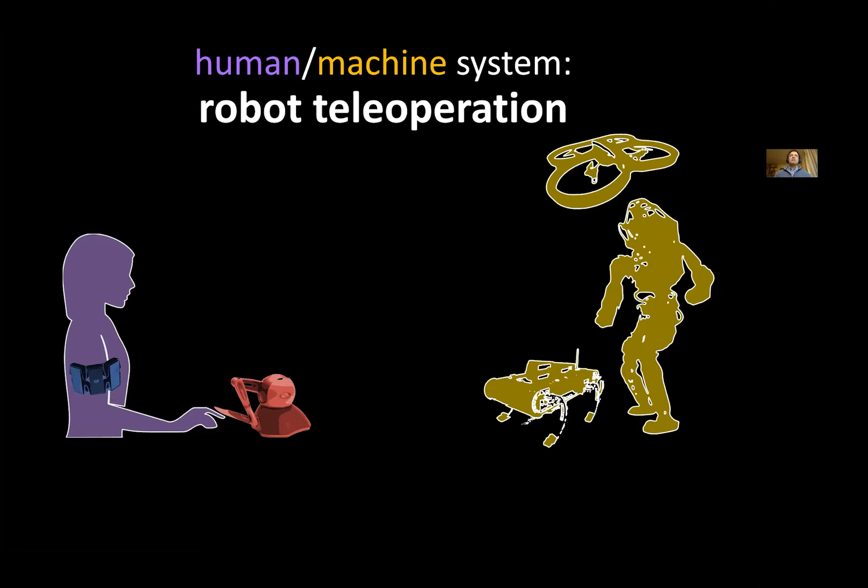So for the purpose of describing my research and grounding this discussion a bit more in a specific set of examples, let's think about the problem of robot teleoperation. This is nice because it has the human in the loop, but it pulls the human and the machine apart so that we can cleanly design and reason about the interface between them, and they're not necessarily physically directly coupled the way they are in those other examples.

And so the basic idea, if you haven't seen this picture of robot teleoperation before, is that we have some interface, mechanical, digital, display, things like that, that's recording information from the human. So they have a joystick, or some other fancier interface, an example of which I'll talk about in the second part of my talk, providing input to the robot. And the robot is in the same room, or across the hall, or away in a field somewhere. So it's a remote robot.

And then that robot is providing back some sensory input that's displayed to the person in a variety of ways. That could be as simple as a computer display, or maybe a virtual or augmented reality headset, or it could be more fancy like a vibrotactile display, a haptic feedback system, or potentially direct neural stimulation. And again, robot teleoperation itself is a very big field with a lot of different possible applications and contexts.

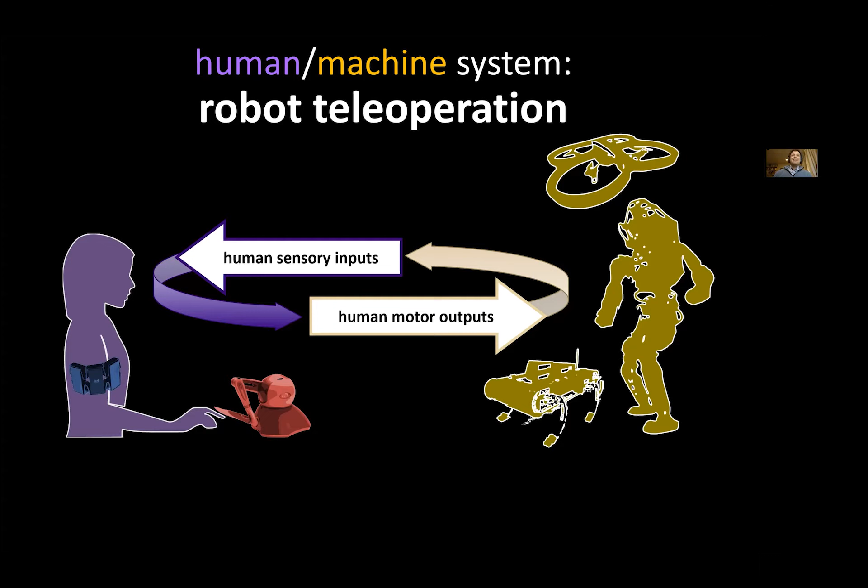So just to put a finer point on it for the purpose of my research, not necessarily the other people's that will be in this colloquium series, and something that's probably on everybody's mind in recent memory, think about the challenge of what we do when there's a forest fire. Right now, other than just cross our fingers and hope it doesn't come too near us, what we do is we send in very brave first responders, right? So we might evacuate some subset of the general public, but we immediately put more people directly in harm's way to try to protect our communities and people. And that's the best that we have at this point.

But wouldn't it be great if we could pull those people out of immediate danger and replace them with some kind of firefighting robot, so that if that robot were to burn up in the fire or get damaged, that would cost a lot of money to replace, but it wouldn't be a loss of human life.

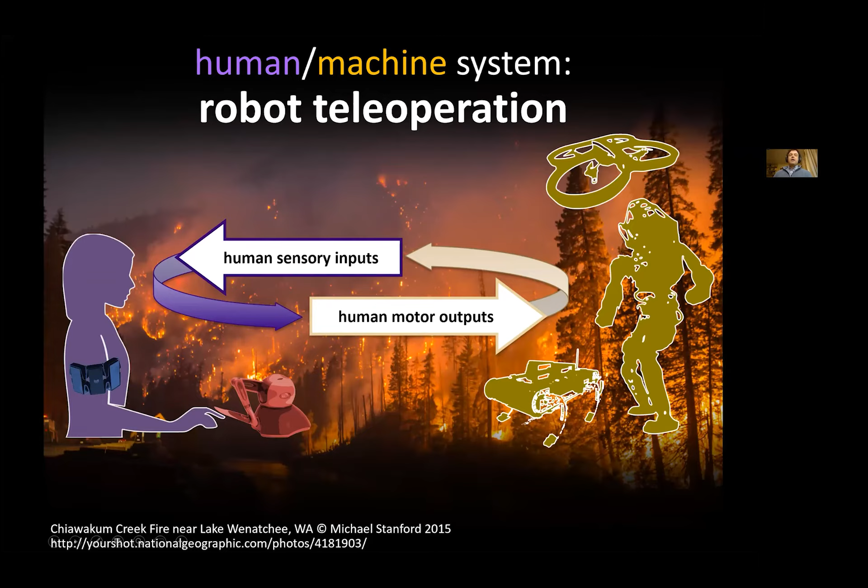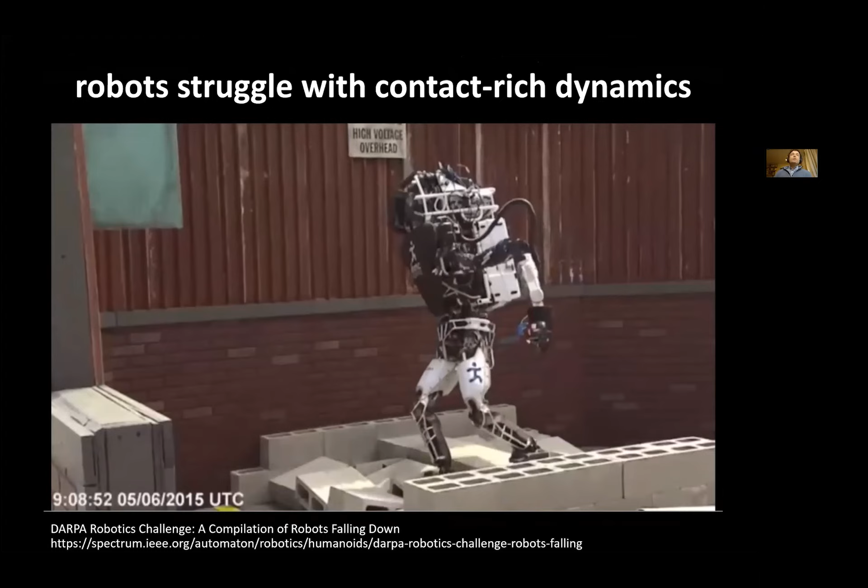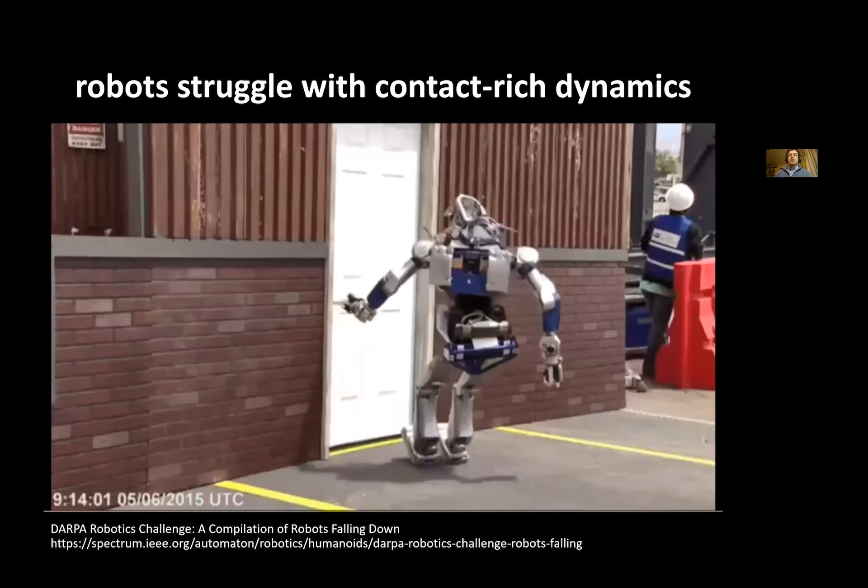However, if you happen to track the results of a recent worldwide multi-million-dollar robotics competition, you wouldn't want to rely on autonomous robots to do your firefighting tasks or other kinds of safety critical, high operational tempo tasks for the foreseeable future. And I don't like to make fun of the outcomes.

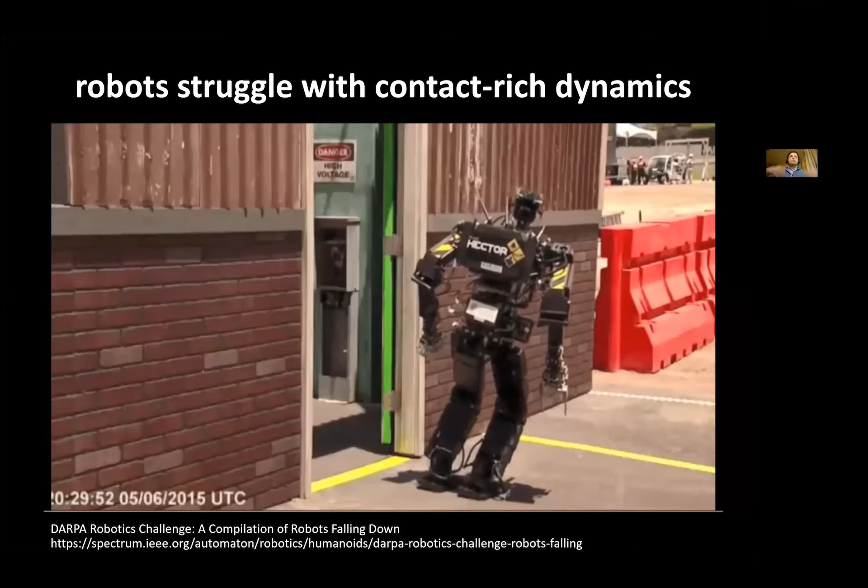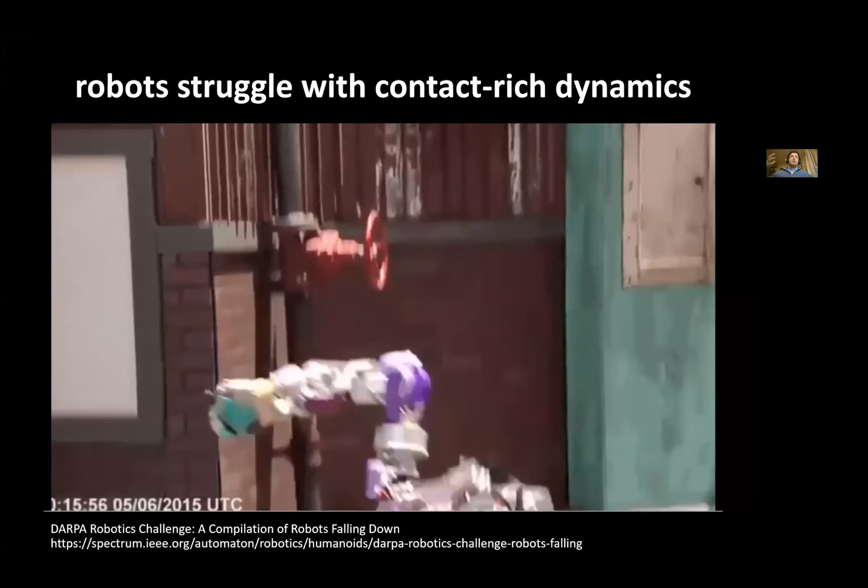I mean, actually, there were really striking successful demonstrations in this competition where these huge hundreds of pound 30 degree of freedom humanoid or other kinds of bizarro robots were able to coordinate, once they got within the reach of some tool or some task, turning a valve, opening a door, something like that. In many cases, they were able to coordinate all of these joints and these hundreds of pounds of equipment and everything, and integrate fancy perception systems with optimal controllers and things like that, and execute these full body maneuvers.

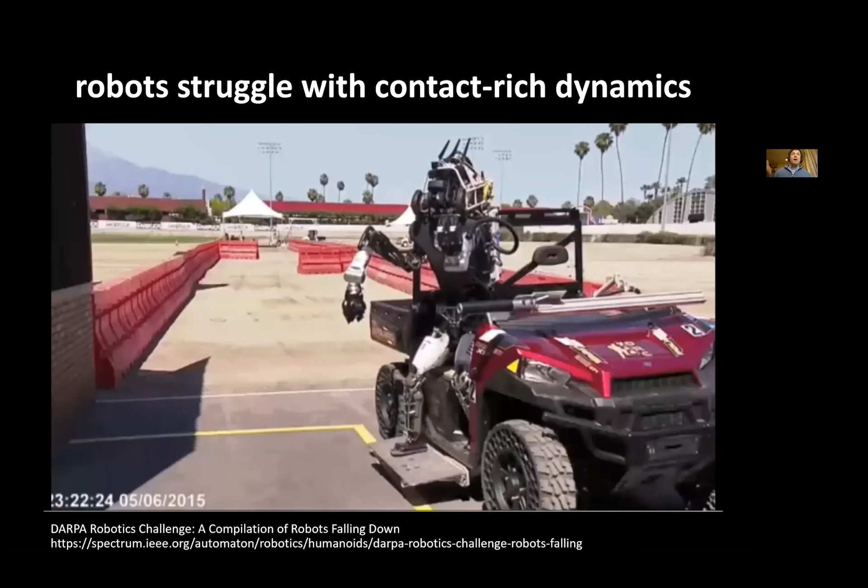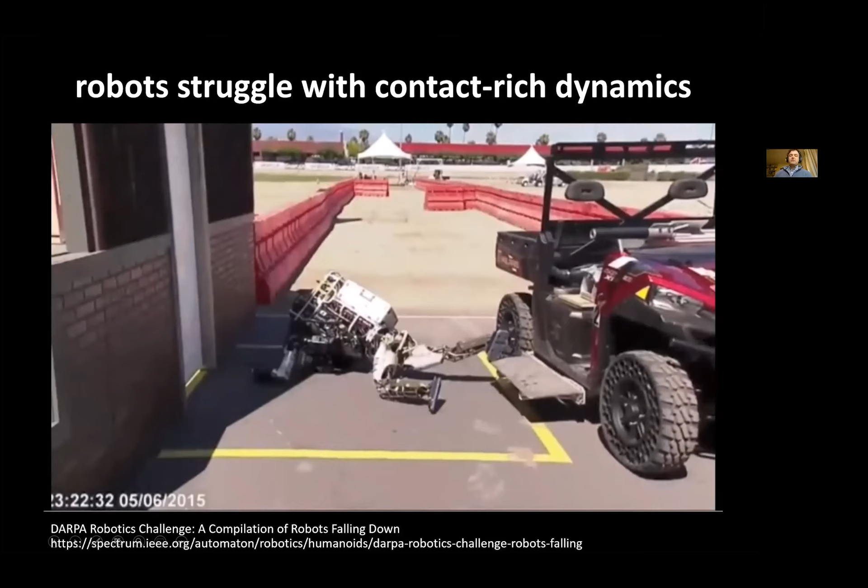But even just getting to the task in the first place proved to be a challenge for a number of teams throughout the competition. And if you don't know the background behind this whole competition, this was multi-million-dollar prizes on the line. There were companies and research groups from different universities around the world that competed. And so the takeaway for this is that we're not going to really rely on those immediately for our firefighting future.

But even in more conventional or more familiar applications than this futuristic firefighting scenario, we have to be careful about what happens when we can't just dump people in the middle of an automation loop and expect good things to happen. So the aerospace industry has known this for decades. They have this well-characterized phenomenon they call pilot-induced oscillations, which arises when you're trying to build a high-performance aircraft. You're designing it, in its low-level control and its physical design, so that it's nearly unstable. It's right at the margin of instability, or maybe slightly unstable, and you rely on the pilot to stabilize and control the maneuvers of the thing.

However, if you fail to take into account the fact that the pilot itself is a biological system that has fundamental neuromuscular delay, visual motor delay, then those delays, once they're incorporated into your tight, nearly unstable feedback loop, can cause instabilities. And this has actually led to the crash of multiple test aircraft.

So imagine you're working at Lockheed or Boeing, and you've spent 5 or 10 years designing the next generation fighter craft or rotorcraft. And then the very first test, it all works great in the wind tunnel and all of your benchtop tests, and you put the pilot in there, and they have to abort and eject because you didn't take into account their biological reality. So this is something that's been really well studied in that field, and still an issue that always has to be taken into account. A more recent example that more of us may have firsthand experience with is the inclusion of so-called enhanced safety features in automobiles.

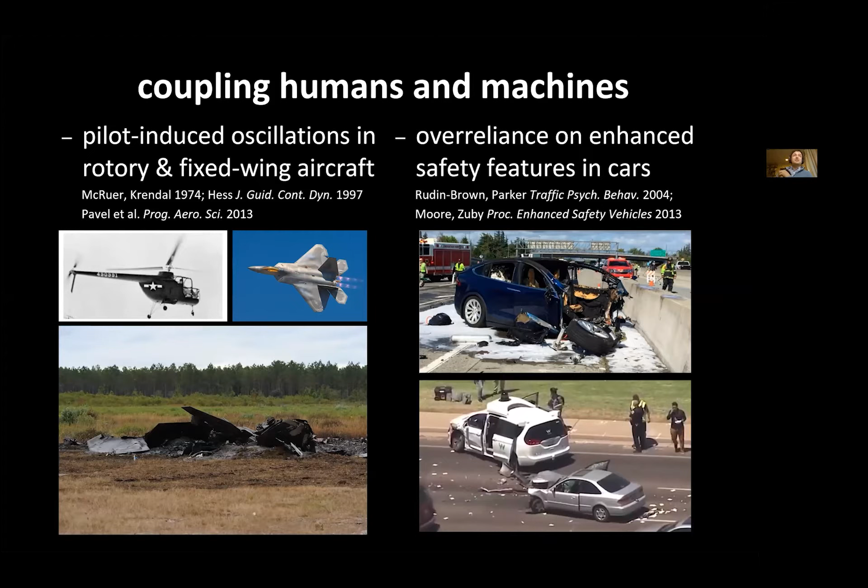So at least according to that insurance company, it's much safer to drive my current car with its safety features. But the point here that I'm trying to drive home is that we can't just dump people into the middle of automation naively. We have to consider the dynamics that the person brings into that feedback loop to engineer things safely.

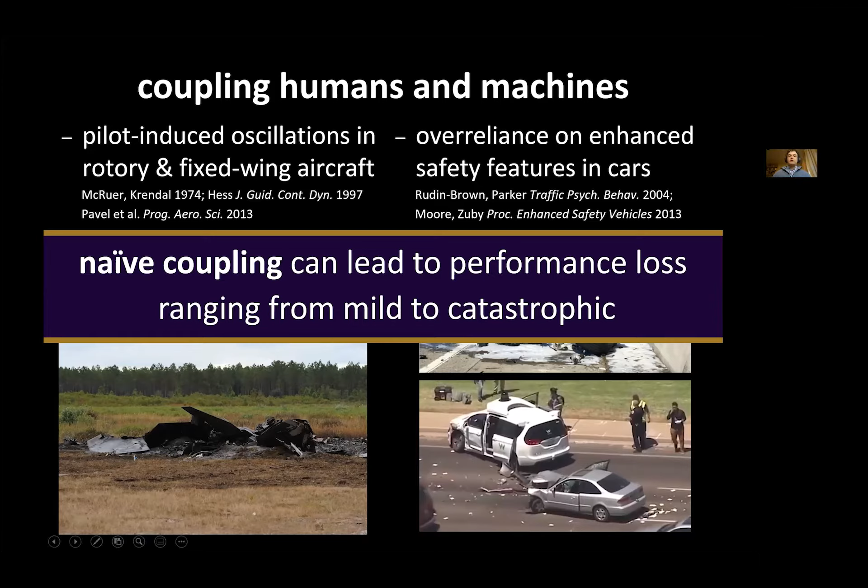So returning to this big picture, the broad question that's motivating a lot of my research program here at UW will be the topic for the rest of the talk, and really is, I think, the overarching theme that I tried to assemble for this whole colloquium: how do we enable people to learn and control the dynamics of robots that are interacting intermittently through contact with the environment?

So to give just a brief high-level picture of what the rest of this series is going to look like, I basically got the charge from Professor and Chair Eric Klavins to design the colloquium, invite speakers that I wanted, basically my favorite people in my field. And one of the few benefits of travel restrictions and lockdown and pandemic is that it's much easier for people to say yes to a virtual invitation than a physical invitation that they have to travel to. And so I got everybody that I wanted. I could add another 10 if I had another 10 slots, but these were my top people that I wanted to hear from.

And with the exception of Ram Vasudevan, who's a long-term collaborator of mine, we were grad students together at Berkeley, these are all people that are leaders in my field that I've been looking up to since I was a grad student, and I'm really thrilled to be able to share all of their work with you folks and with your community.

They span all kinds of different areas, from neuroscience to robotics, to rehabilitation, to microsystems and microrobotics. And we have several leaders in industry, people that are CTOs of various technology companies or research labs in industry. So I really think that there's something here for almost everybody, if not everybody, in our broader ECE community. And I'm just really thrilled to be able to share these people and their work with you.

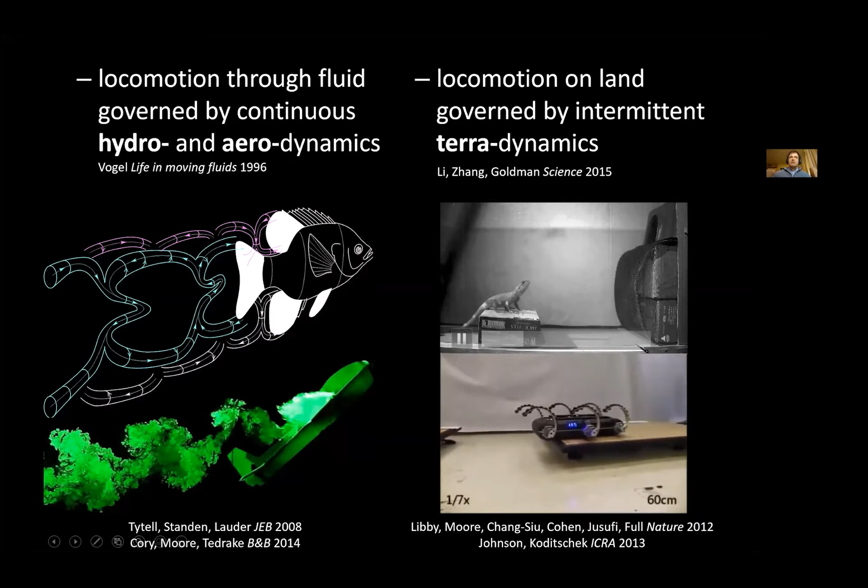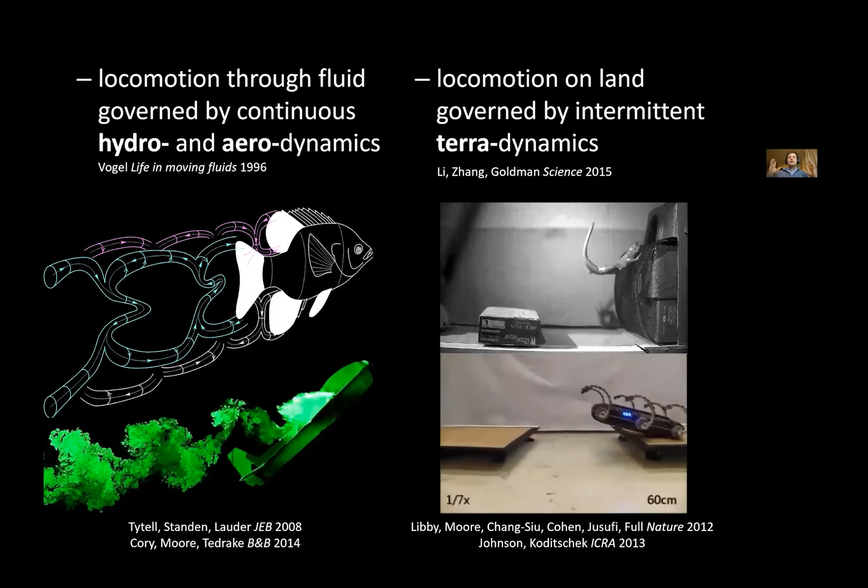In the case of legged robots, or animals that are intermittently slapping their legs on the ground, we don't have an analogous first principles sort of theory, and there's kind of an emerging empirical phenomenological collection of rules. But the key observation, I think, underlying all of this is that when I'm immersed in a fluid, I'm sort of always exerting forces and having forces exerted on me when I move my body around. But when I'm doing legged locomotion, neglecting air resistance, I really only have control authority, and my dynamics are changing dramatically, as I make and break contact with the environment.

So from a modeling point of view, I'm a control theorist by training. That's been my specialty from undergraduate here at UW through grad school and back now as an assistant professor. So from a control theorist perspective, I like to think of what is a reasonable class of descriptive but parsimonious models for the physical phenomenon I'm interested in.

And so the class of models that I have focused on for the last 10, 15 years are so-called hybrid dynamical models, and more specifically in recent years focusing on the specific structure we get when we have mechanical systems. So we have legged robots or legged animals. And so the flavor of the mathematical model, I just want to give some of the details because it'll help inform our understanding of the theoretical results we have in this area.

The flavor of the mathematical model we have says, okay, I have some number of limbs that can contact the ground. Associated with each of those limbs, I have a non-penetration constraint that says my leg can't go below the ground or it can't penetrate the object I'm trying to grab. If I have a collection of limbs in contact, in a given contact mode, then there's standard F equals ma. There's just Newton-Euler Lagrangian equations that govern how the system evolves. Importantly, the ground exerts reaction forces that enforce the non-penetration constraints, so it actually augments the dynamics in every different contact mode.

And then, moreover, if I want to maintain these non-penetration constraints, if my foot is going down at the ground and it reaches zero height with non-zero negative velocity, then something needs to change rather quickly. Otherwise, my model is going to violate that constraint. And so what we do in this modeling paradigm is we say, okay, we will permit instantaneous resets or discontinuous updates of state when certain events happen. In the case of these contact dynamics, as I make and break contact with the environment, I could have a discontinuous change in state, and I could have a corresponding discontinuous change in the forces. So that's kind of the symbolic language of this.

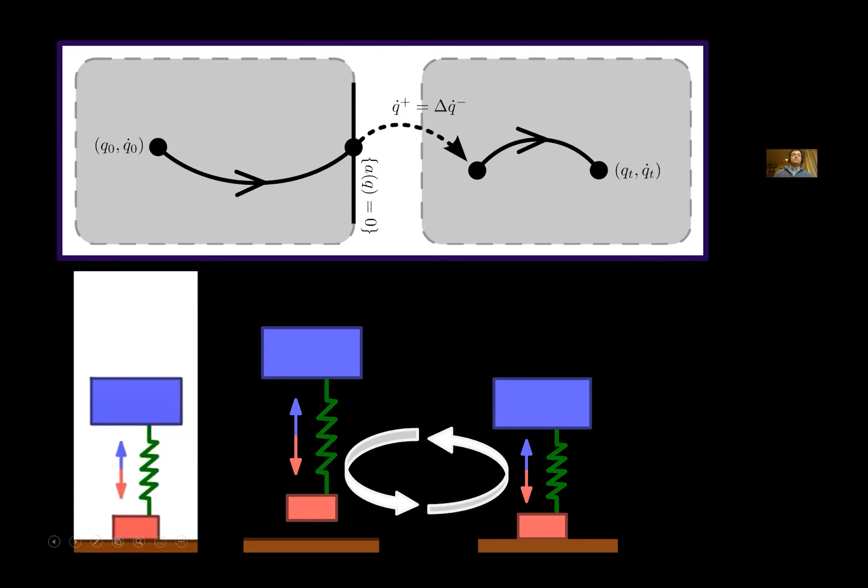And you might look at these dynamics and think, gosh, they really look like they have this big striking discontinuity in them. But one of the early results, of course, it was the Russians that figured it out in the 50s, is that even though there is this jump discontinuity in the middle, if I think about how trajectories vary away from moments of impact, then you can actually get very reasonable dependence on initial conditions, by which I mean the initial state, but I could also lump in parameters and control inputs and other kinds of information like that.

So for instance, if I perturb away from my initial state in the red or the blue directions, and then I go to my final state, final time t, which is not an impact time, then the way the final state varies will be continuous and actually classically differentiable with respect to that initial state. This seems kind of counterintuitive, so I'll just state the theorem, give the reference.

But it's basically, look, even though there is this jump in the middle, the overall process of flow to the boundary, then jumping, and then flowing again, composing all of those together mathematically gives me a smooth function. So I get this differentiable dependence on initial conditions.

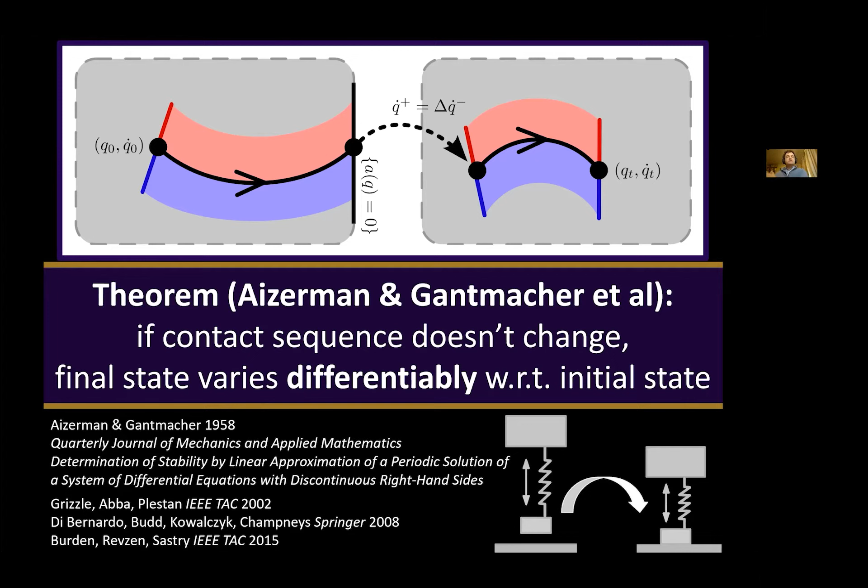Again, this result's been known since the 50s. I'm a member of a long line of people who have rederived this result in various contexts, so I won't tease them too hard about that because I'd be teasing myself. But the point is that when you know the sequence of contact constraint activations and deactivations, you get this smooth dependence on initial states. So a big question that my group is focused on is what happens when that sequence of contacts can vary.

So I have in the top here a video of a 6-legged robot that came out of the lab that our professor and chair Eric Klavins did his PhD in, 6-legged RHex robot that runs like a cockroach. So it uses an alternating tripod. 3 legs are coordinated and anti-coordinated with the other 3 legs. A more familiar kind of behavior is the bound of this quadruped robot, where the front 2 legs hit the ground at the same time and then the back 2 legs hit the ground at the same time.

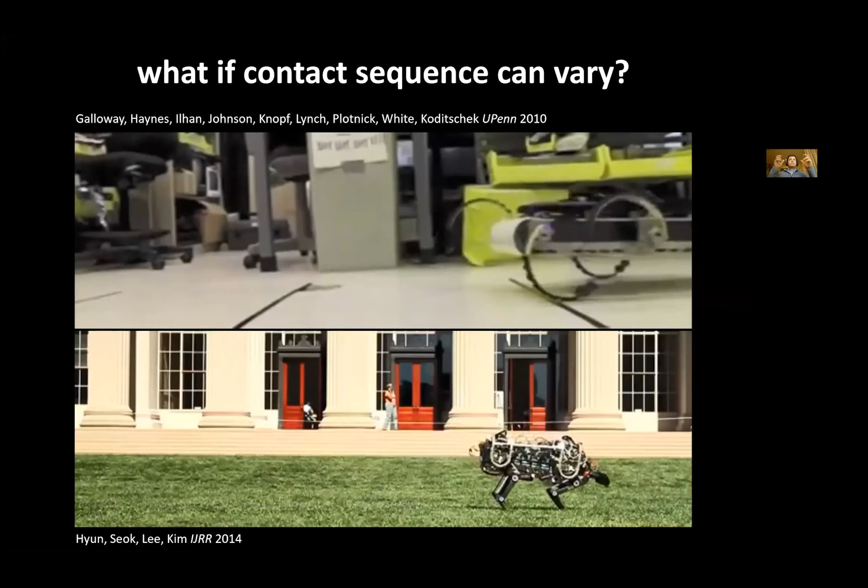But these are the nominal behaviors, right? If my hexapod or my quadruped get perturbed at all, so the ground's a little uneven, an actuator or a sensor blips for a moment, or we go up and actually kick the thing or something like that, then the feet will in general fall in different sequences. And the question is, what happens near those kinds of events? And the answer is actually quite troubling in general.

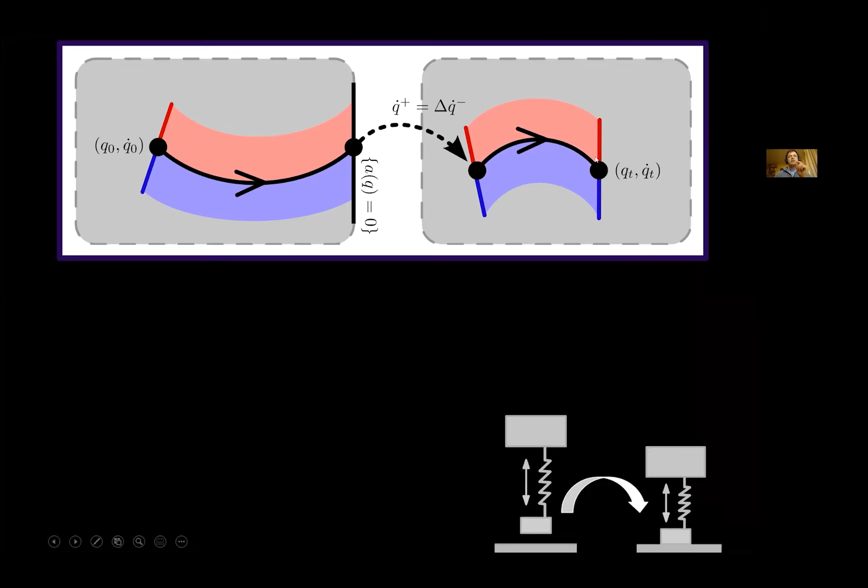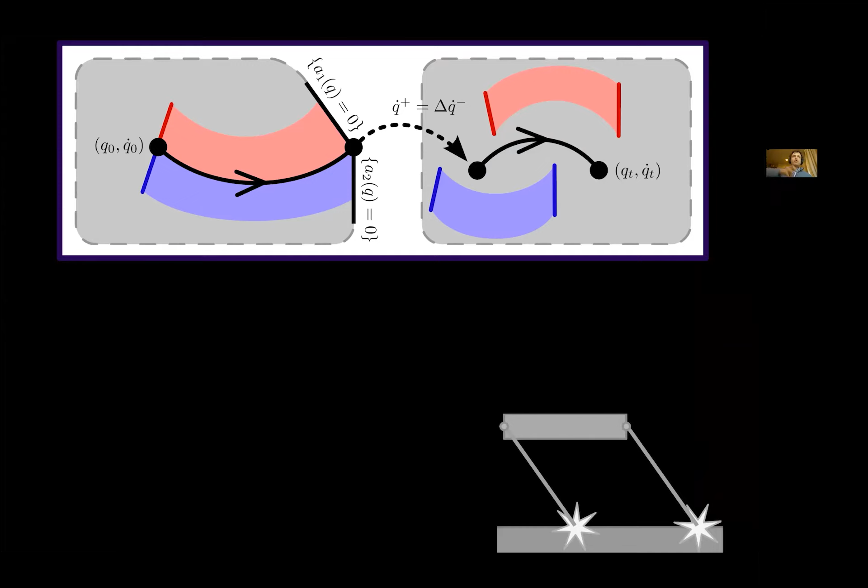So in general, if I build my robot in a conventional way, which is assemble a bunch of rigid struts together to make a rigid kinematic tree, then what happens in going from the difference in these 2 slides is there's only one leg touching down or only one constraint that's activating here, and I get this continuous and smooth dependence, versus multiple constraints, multiple footfalls activating at the same time. And what happens is trajectory outcomes get broken apart and they get split into distinct regions of space.

This is not a result of ours. This has been observed in the robotics literature a couple of different ways. Here are my 2 favorite examples. One is if I have a rigid object I'm manipulating, and if I have a manipulator that's a rigid kinematic tree. Of course, my hand is not a rigid kinematic tree. It's soft and squishy, but imagine that it was like a rigid robot hand, like from a 1950s or 1980s sci-fi movie or something.

Then here's what the model says. If I have some number of digits, fingers in contact with the object, and then a new one comes in and impacts with non-zero velocity, some subset of the digits have to pop off, and which subset pops off is not uniquely determined. It's basically decided by which 17th century mathematician you trust for your law of instantaneous impact in mechanical systems. So whether you're a Newton fan or a Legendre or an Euler or something like that. And so the point being that if you have these rigid collections of limbs, then you get these inconsistencies in your post-impact state.

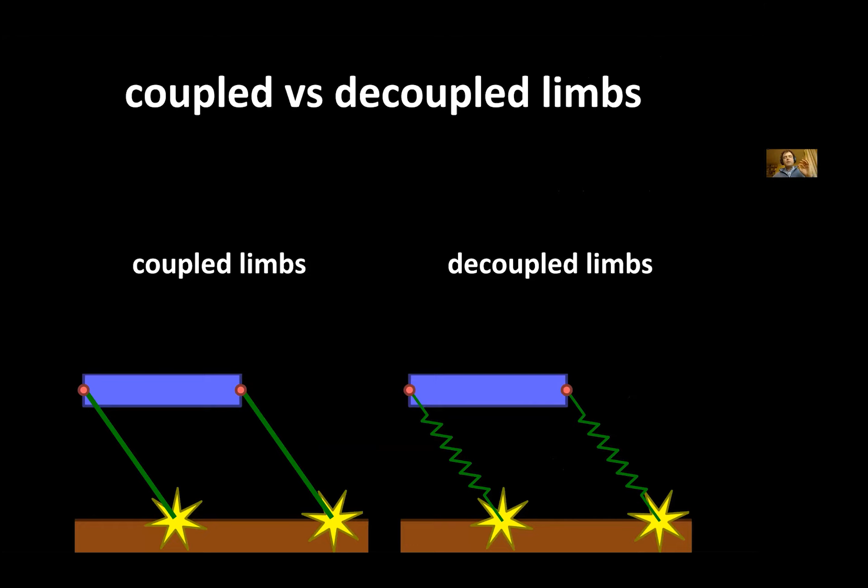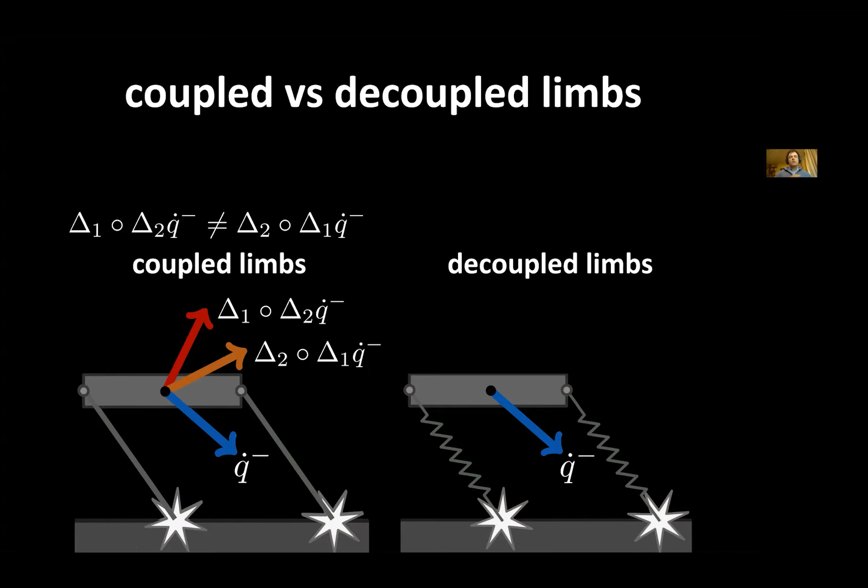And just to give a little bit more intuition or a little bit more detail about mathematically what is it that happens here that's driving it? When I have this rigid coupling between all of my limbs, then if I think about a simultaneous impact event, I could, by changing the initial condition a little bit, have one impact happen before the other, or vice versa in the other order. And when I have this rigid coupling, those two operations don't commute. So I get these two inconsistent outcomes from this same kind of event.

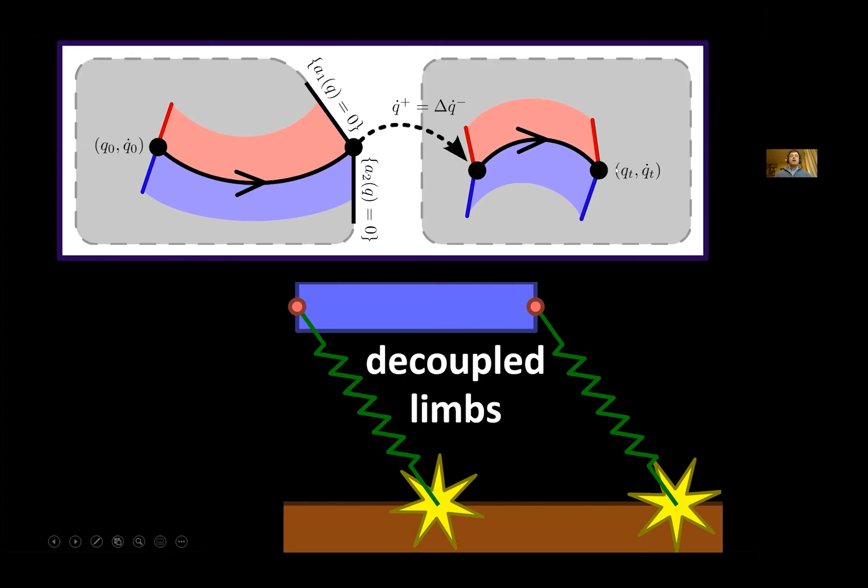But if I have a mathematical condition that I'll give a little bit more intuition about in the subsequent slide, if I mathematically decouple, get rid of this rigid coupling between things, make the limbs compliant or make them very, very light, so nearly massless, then these two operations commute and I get a consistent outcome. So the upshot is the theorem that we proved is that if you have this decoupling between your limbs, so not these kind of rigid constraints that we conventionally build robots with, then you actually recover the continuous dependence on initial conditions.

In fact, you get something stronger than that. You get a form of differentiability that's not classical. So I'm trying to illustrate this by saying visually, if I perturb in the red direction or the blue direction, I still get continuous dependence in the final condition, but the direction at the red direction at the final condition is different than the blue direction at the final condition. So there is a first order approximation in the red and the blue direction,

but they're not given by the same linear operator. If you're interested in details, then we have a sequence of papers developing this non-smooth calculus, or applying this non-smooth calculus that was originally developed by the optimization community, and then applying it to these mechanical systems to get these kinds of results.

And I really want to highlight Andrew Pace's contributions to this result. Andrew Pace is my second most senior PhD student. He's the most senior PhD student in my lab in that he's defending his thesis tomorrow. So he's about to become the second graduate from my group. But he's really the technical powerhouse behind this particular result. So what's fun about this talk is that I get to highlight work from my senior PhD students and a postdoc that I've had in the group in recent years. So this is all stuff that came out of UW.

Okay, so now I have a way to reason about trajectories varying continuously in these mechanical systems that go through different contact mode sequences. And so a natural question to ask from a control theory, design, or stabilization perspective is, do trajectories contract or do they expand? So do they get closer together over time or do they get further away? And so really this question is not a topological question or a differentiability question the way the previous questions were. This is more of a metric question, right? So if I start at X and Y, and then I end up at XT and YT, am I closer together or further apart than I was before?

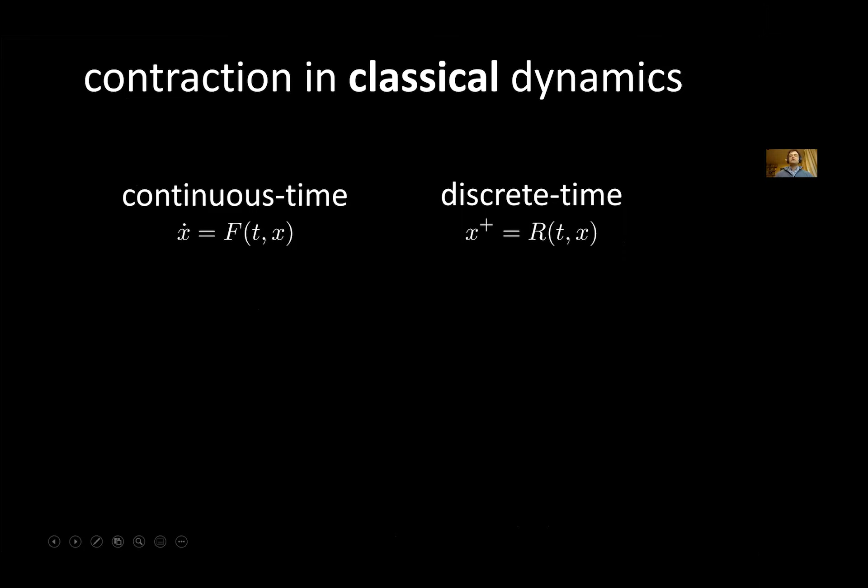So then the technique that we were able to generalize is a concept called contraction analysis or infinitesimal contraction analysis. So first I'll describe briefly what it looks like in classical systems, meaning smooth differential equations or difference equations, so dynamical systems that evolve in continuous time or discrete time, before I present our result that merges these two and applies to these hybrid or piecewise defined systems. So a notion of infinitesimal contraction and the kind of result you can get.

Now, this comes from a famous paper by Lohmiller and Slotine. They're not the first ones to come up with the idea. Of course, it was a Russian, Krasovsky, in the 50s or something like that, or 40s.

But they have a very nice and famous expository paper that illustrates these ideas, and it has very strong intuitive appeal. So I have a nonlinear but smooth system, x dot equals f of x, or x plus equals r of x. And what I can do is check properties of the linearization of the dynamics. Now, this is not linearization at an equilibrium, because the system's time varying. I don't expect it to have an equilibrium.

This is linearization everywhere. So I'm looking at the Jacobian of my vector field, or the Jacobian of my resetting map, defined everywhere. And then what I'm doing is checking a linear algebra condition on all of those matrices. Now, granted, this is an uncountably infinite number of matrices, but in some special cases you can actually check these conditions.

And if I get a condition on the eigenvalues of the symmetric part of the Jacobian of the vector field, or the largest singular value of the linearization of the reset map, that kind of local characterization of how trajectories locally or infinitesimally, using derivatives, expand or contract, then I can get a really strong global conclusion about the fact that all trajectories are converging toward one another at an exponential rate.

This is an incredibly strong property that systems don't have to have, or in particular, they don't have to have with respect to kind of a natural or obvious metric that you choose for a system. There are sort of converse results that if a system is stable, then there is a metric with respect to which it satisfies this kind of contraction condition. I'm not going to talk about that.

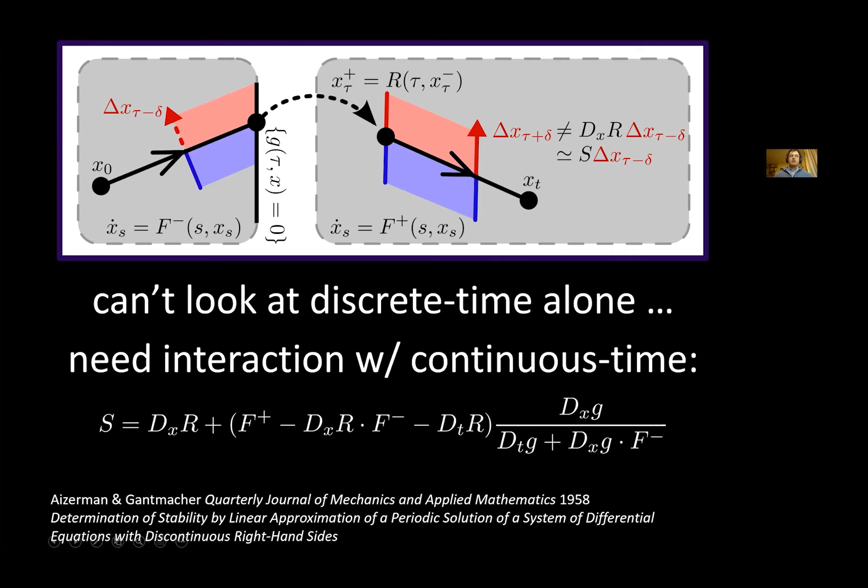And the formula is kind of complicated, but I think the point that you can take from it is that I can't just look at the linearization of R. That appears in there, but that's not the only part. I also need to look at how the vector field interacts with the surface that defines the reset function and the function that defines the reset and things like that. Okay, so I'm not expecting you to completely understand those technical details.

The point is that now I can tell you how we go from this local to global characterization of contraction in these piecewise defined or hybrid systems. We need, of course, contraction in continuous time and contraction in discrete time, but with the asterisk or caveat that I'm looking at this saltation matrix that accounts for the interaction of discrete and continuous to then get this global contraction between trajectories.

And an important caveat here is that the distance metric I'm using here is that funny intrinsic one I introduced by doing the violence to the different states of the system and saying the state that I'm at immediately before and after I reset are actually the same state at zero distance. And only with respect to that metric do I get this kind of global contraction condition.

Because of course, if those were treated as different states at non-zero distance, then every reset takes states that are arbitrarily close and breaks them apart, pushes them far away. But that doesn't happen in an intrinsic sense. Okay, hey, so Sam, I have a question about that. Yeah, please.

Can you imagine a situation where you get a sort of cyclic set of constraints about defining this metric that's somehow inconsistent? You know, like the distance between these two has to be the same, and then you flow for a while, and then the distance between these two has to be the same, and you go all the way back to the beginning, and it's like something happened that these two can't be the same if all those other things are going to be the same.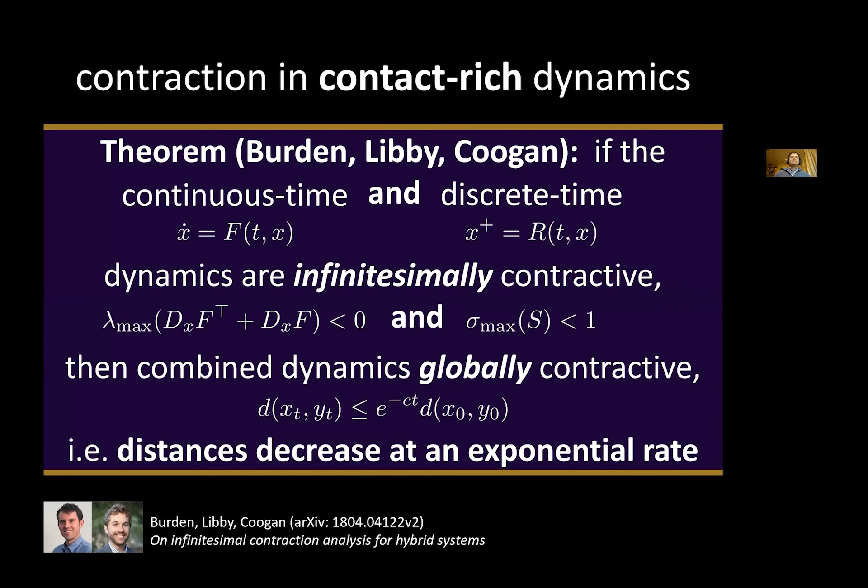Yeah, that's a great question. So let me go back to this slide. So it's definitely a concern, and in particular, you know, I can quotient topological spaces. I can define equivalence relations and declare this is the same as that, and now I get a new space. And then I can also separately define distances using some rule like this, and then maybe taking this as the basis to then define a distance.

But you might wonder whether or not what I get is a distance function, even like a distance candidate, meaning is it symmetric, does it satisfy triangle inequality, things like that. And then does it have any relation to that quotient topology? And there are definitely counterexamples to all of these things.

So our contribution is kind of several components, which is first showing that the distance function we define based on this rule, or with this rule as the kind of starting point, is an actual distance metric, and that the topology corresponding to that metric is the quotient topology, so it's compatible with that quotient.

So it's definitely a valid concern, and there are definitely counterexamples in sort of abstract topology, but by restricting the properties of the hybrid system, we're able to get this kind of consistency. Sort of follow-up question, Sam. Yeah. How does this relate to energy and passivity? Because if you have a little energy loss at the reset, does the distance metric still apply, or do you have to modify it? Yeah, that's a great question.

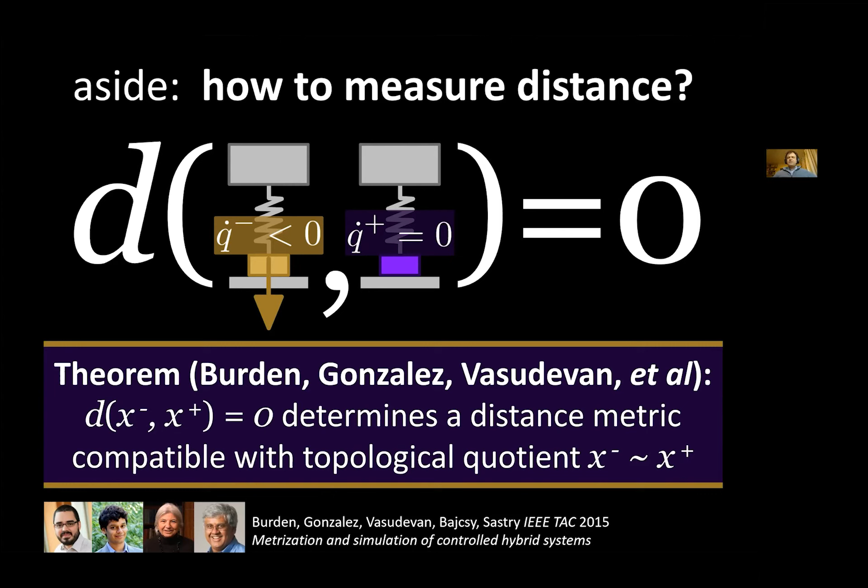So in mechanical systems, even if they're undergoing impact and things like that, I do have somewhat natural candidates for either distance or like a Lyapunov function, because it's energy, total energy in the system. And there are a couple ways in which that connects with what we're doing here, and then some ways in which it's kind of distinct. So let me show my example, because I think then I can better address this question.

To satisfy these infinitesimal contraction conditions, it's not enough that we replace our rigid links with squishy elastic ones, so spring dampers as the simplest instantiation of that. That was necessary to get continuity and piecewise differentiability according to the first theorem. But to get this contraction to happen, we actually have to go to viscoelastic limbs.

The reason for that is that the discontinuity in the force in a regular elastic limb causes problems with this analysis, basically. So if I go all the way to this viscoelastic picture, then I satisfy these strict contraction conditions, and I know trajectories meet.

But then to get to Blake's question, if I think about this vertical hopper system and I do the mental simulation, or I just reason about the equations, if I looked at potential plus kinetic energy, then if it's a spring damper and there's no external input, those things are decreasing in continuous time, and they're decreasing at the discrete time reset. So it really feels like the system should be contractive, trajectories should be getting closer because energy is dissipating.

Now, so this is showing in one sense that our infinitesimal contraction conditions are a little bit more stringent than that kind of characterization of a system, like energy decreasing over time, because that energy decreases in the elastic limb as well as the viscoelastic limb.

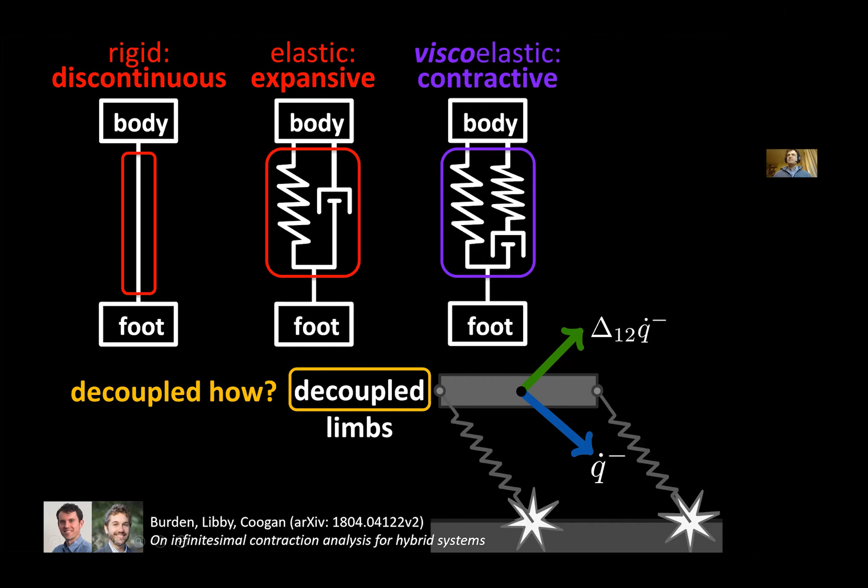Okay, fantastic. Thanks so much for the questions so far.

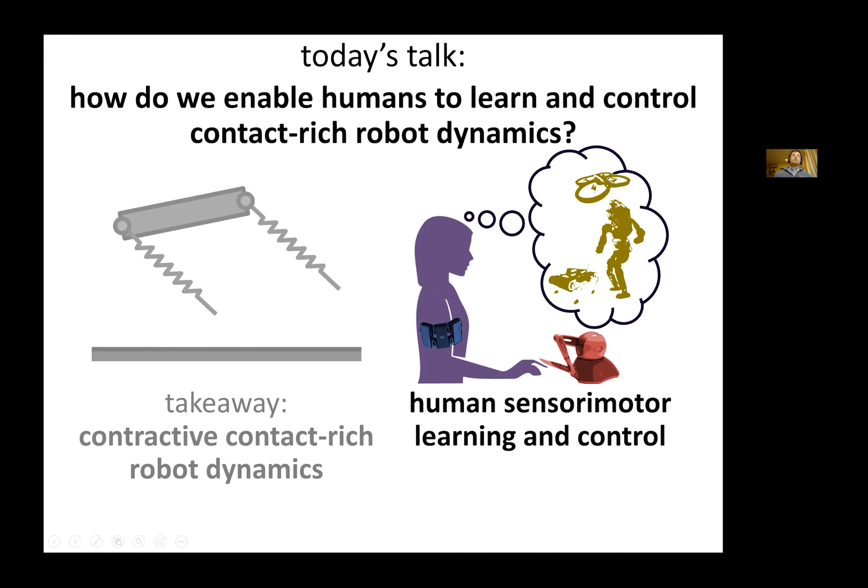Now I'm going to switch gears and talk about our work modeling human-in-the-loop control systems. I'm going to go a little fast. I want to make sure that I end no later than 11:25 to respect people's schedule constraints. But I'm really excited about this work, and I want to share it and give it significant airtime. So our work is building on a paradigm that dates back decades.

So McRuer is one of the big names, aerospace researcher in the 60s. And basically we're going to plop somebody at a computer console, a pilot console. They're going to have one or more kinds of inputs they can apply to a system, like a joystick or some fancier inputs I'll describe in a second. And then we will display information to them on a computer monitor.

This is a schematic from a 1959 paper where they do this. There was literally an O-scope that's being used to display pictures on the screen. We just have a more modern digital version of this setup. And as I said at the beginning, I'm a control theorist.

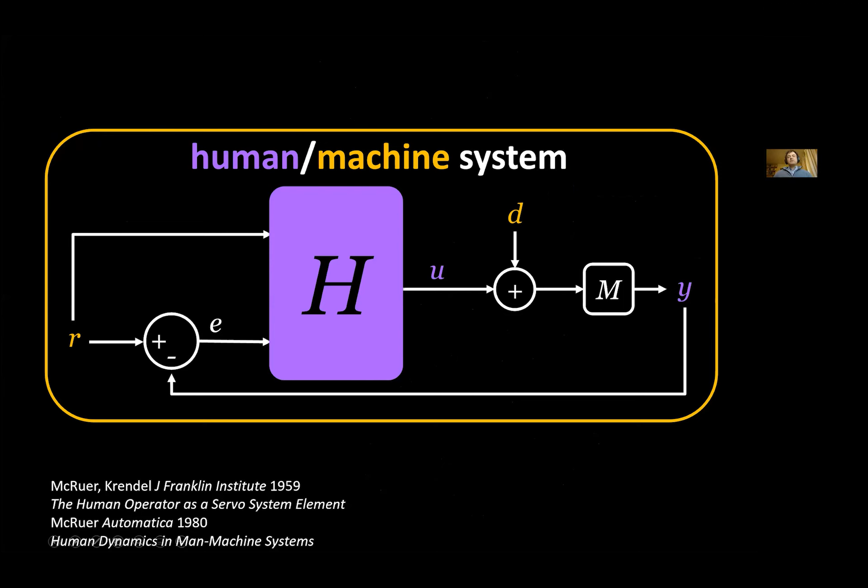And so I look at that physical setup of the person trying to pilot something, play this little video game, twiddle the joystick, make the screen do what they want it to do. I view it in the form of a block diagram. And as a control theorist, my big question here is what's inside H? What is the human doing?

What is the transformation they implement between error signals from where they want to be and where they are, R minus Y, and possibly just looking directly at the reference that they're trying to track, to their output, and then how does that behave in closed loop with the machine dynamics that we're prescribing?

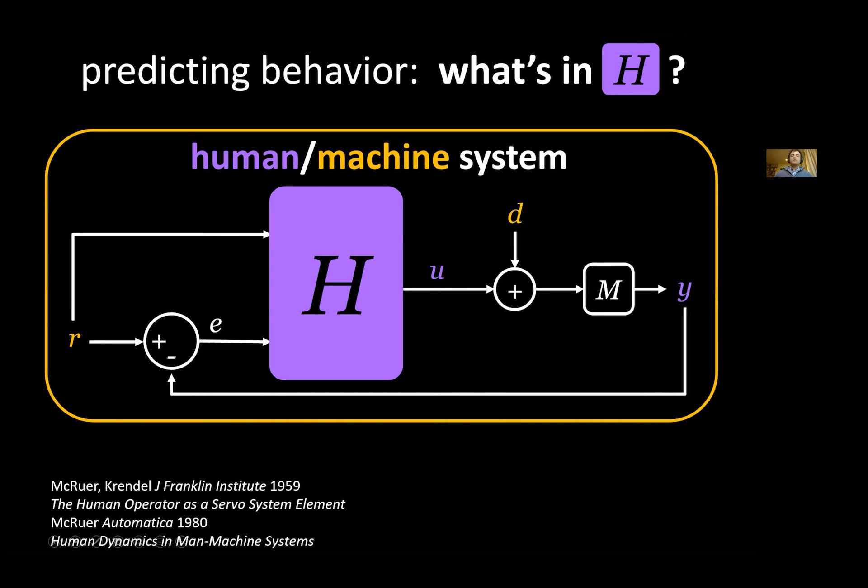Now, in terms of hypotheses about what might be inside that human block, there's actually a lot of literature to draw on. Outside of control theory, the neuroscientists, sensorimotor control people, have been thinking about this for a long time, and they have this very reasonable hypothesis that probably somewhere deep in the person's cerebellum or motor cortex or other parts of the brain that I don't even know what they do,

they learn some model of the system that they're working with. Let's call that a system model or a forward model. And then they invert that model in some sense to control it.

So basically that says they see what they want to do, Y, and then they choose their input to do it according to the model that they've internalized. And the reason this is a particularly appealing theory of motor control for our work is that it has really strong parallels in the engineering and other kinds of mathematical circles that I run in. So strong parallels in adaptive control, concepts like the internal model principle, reinforcement learning is very compatible with this picture as well.

And so just one tweak I'm going to make is that I'm not going to call this an inverse model, and empirically it bears out that people don't exactly invert the machine dynamics that we're displaying to them. They do something approximately like inverting it. And so as a proper control theorist, I'm going to refer to that as a feed-forward component of the human's controller.

So returning to this block diagram, basically what we're doing is we're hypothesizing that inside that block, there is some kind of structure that has a feed-forward control term that depends solely on the reference that we're prescribing for the person to track, and then a feedback controller that operates on the error between the reference they're trying to track and where they actually are.

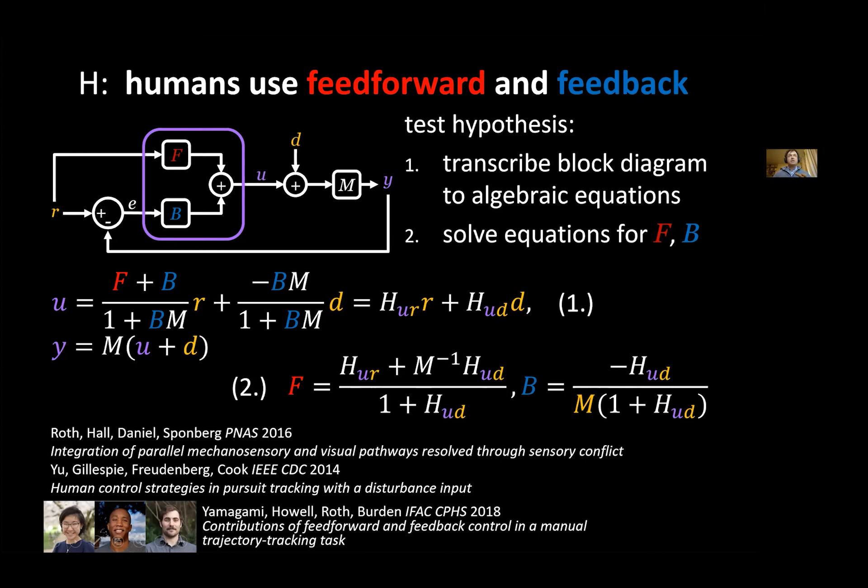So HUR, HUD, these are the empirical transfer functions of the transformations the human implements from the disturbance signal that's coming in to their output U and the reference signal that's coming in to their output U. So those are things we can measure, and then we can do these manipulations in software to estimate these Fs and Bs.

And so some of our initial findings were basically just reproducing known results from this deep literature that goes back decades. That, for instance, if I looked at the feed-forward and feedback controllers that I estimate from the person, the feed-forward model looks quite a bit like the inverse of the system model that I prescribe.

So if I prescribe a first-order system model, meaning the person's commanding the velocity of the cursor on the screen, then across a range of frequencies, their feed-forward term provides an approximate inverse for that system. It's better at lower frequencies, and that performance kind of degrades as you increase the frequency.

Similarly, if I prescribe a second-order system, so this is like prescribing acceleration, but there's just a little bit of damping in the system as well, then same story, the person can more or less learn an approximate inverse for the system. So these results are more just validating the methodology and comparing it to prior results, but it's not really our new contributions and the stuff that we're super excited about.

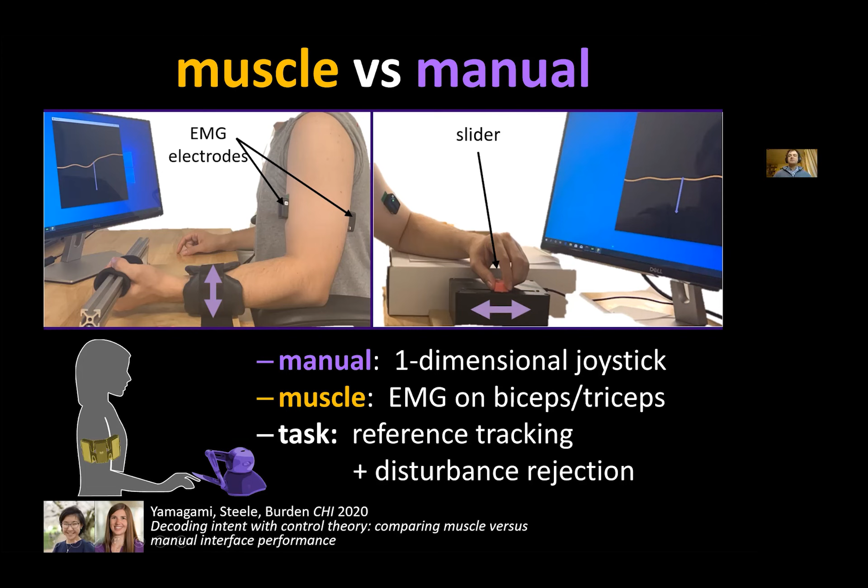And the results, to me, have a very surprising component. So if we look at tracking error, which is the task that we're prescribing, right? We're saying make Y like R, then whether it's a first order system or a second order system that the person's trying to track through, they do basically indistinguishable in terms of tracking error with the muscle or the manual interface. And interestingly, there is a significant difference with the manual interface between first order and second order, so you do a lot better tracking with a first order system with a manual interface than a second order system, but we don't see that distinction with the EMG, although obviously the errors are much more spread out.

But when we look at the inversion, so how well does the feed-forward model that we estimate for the person approximate the inverse of the system model, there we actually see that the person's doing a better job inverting the second-order system with the EMG input, which surprised me a lot, because the EMG signals, if you've ever worked with them or seen any of these data, are incredibly noisy. We have to aggressively filter them to make any sense of them at all. And so I assumed that the performance with that EMG thing would be just dramatically worse across the board.

What we're seeing is, in fact, for a second order system, you're better able to learn and implement the inverse of the system. Now, given that they're doing a better job inverting, but that their tracking performance is comparable, that means that they must be doing a worse job implementing feedback with the EMG interface. So I'm not showing this result to say that EMG is strictly better than manual across all contexts. What I think is cool about this, though, is that it highlights that different input modalities have different properties, and they could play different roles in our complicated system.